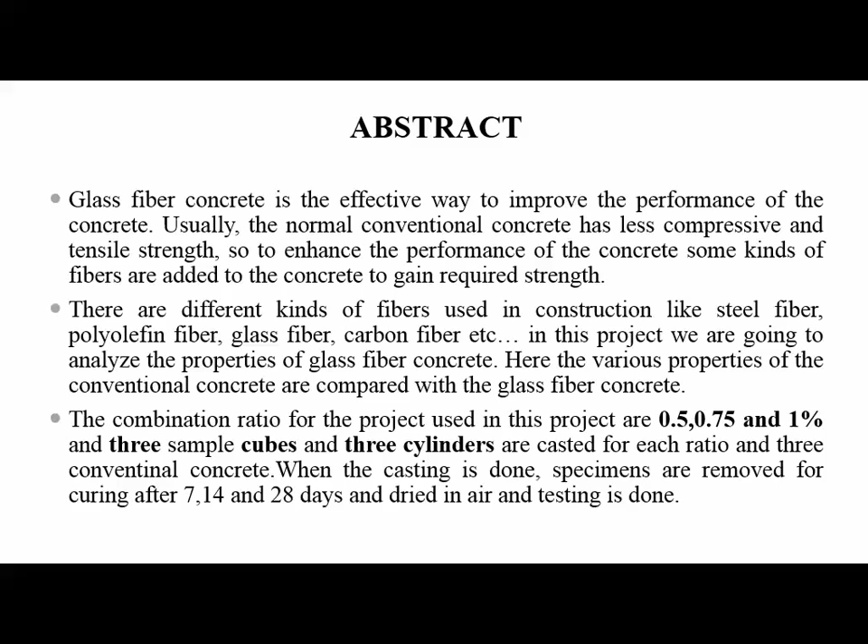Introduction. GFC is an effective way to increase the durability and toughness of the concrete. It also increases the mechanical properties of the concrete like compression and tensile strength, creep behavior, impact resistance and toughness.

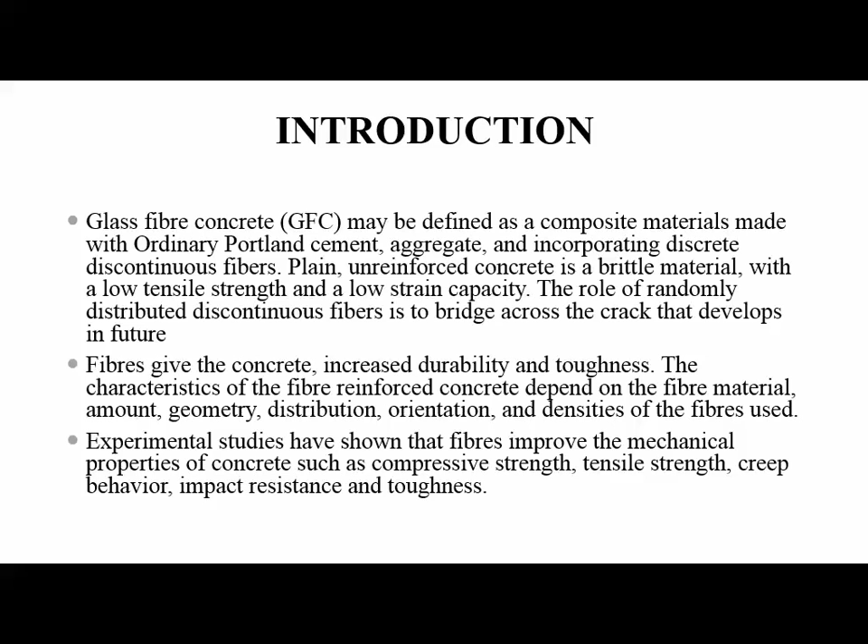Our aim is to determine the tensile strength and compressive strength of glass fiber reinforced concrete and to increase the performance of the GFC in comparison with conventional concrete.

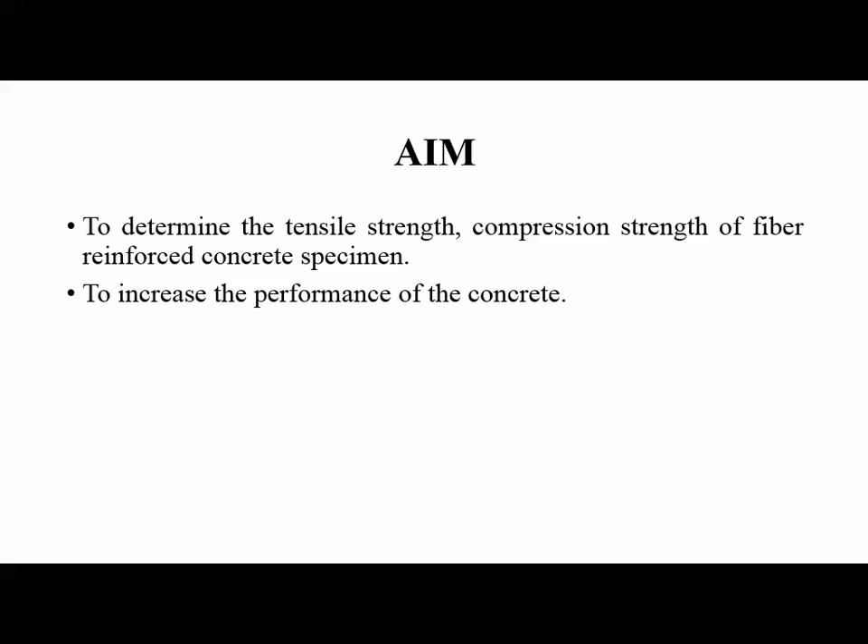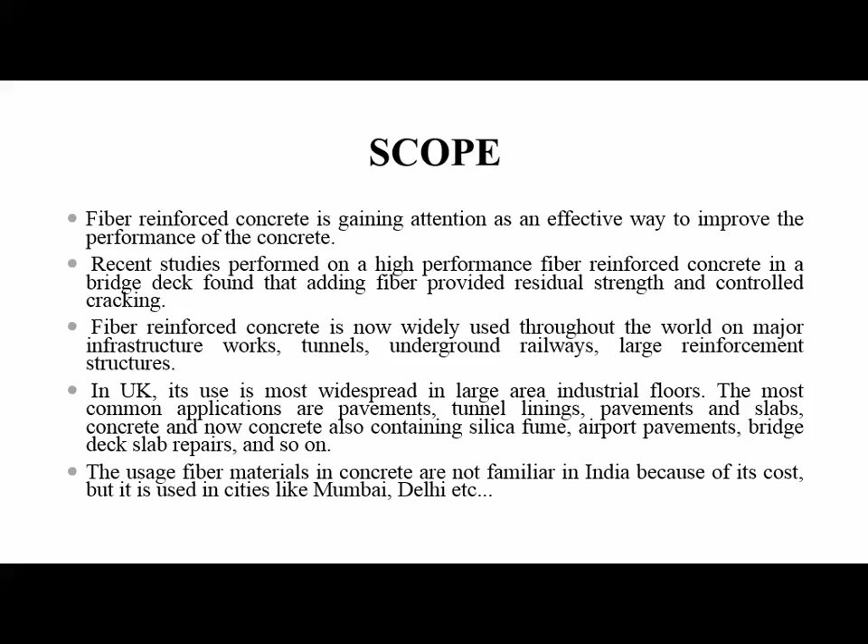The scope of GFC: it's gaining much attention. It's used commonly in developed countries like UK, but it's not used in India because of its high cost, but it is used in some major cities like Mumbai, Delhi, etc. The salient features of GFC are its high alkaline resistance, high dispersion, high immunity to corrosion, high flexibility, and high consistency.

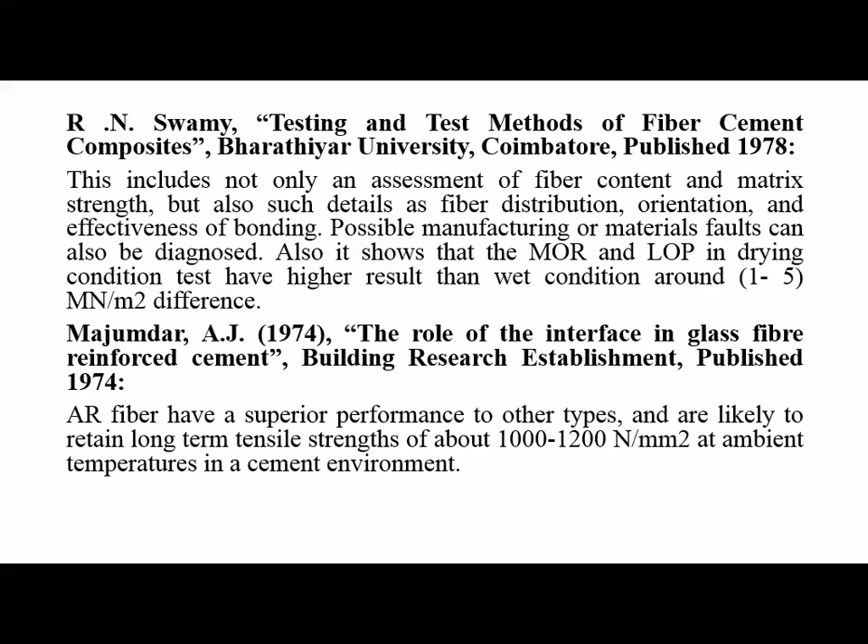Literature review. We study the following articles: Testing and test method of fiber cement composites by R.N. Swamy. The role of interface in glass fiber reinforced cement by Majumdar A.J. Cladding of buildings by Alan J. Brooks.

Methodology. The methodology we followed is first we collected the literature review, then the data collection and analysis of data, buying of raw materials, then preliminary test on the raw materials, then cube is casted and cured, then the testing of cubes and cylinders are done, then the results are obtained and compared with conventional concrete results, then discussion and conclusion, finally the report submission.

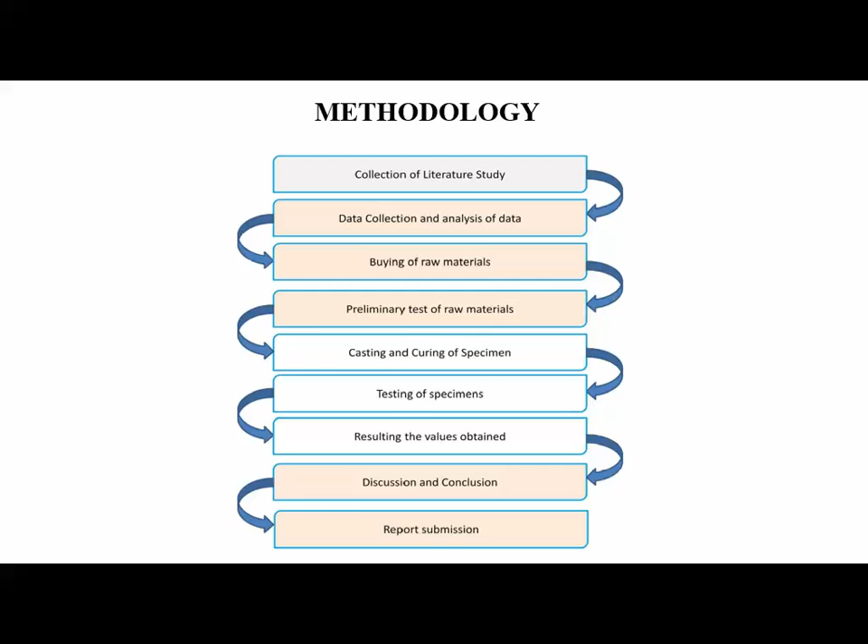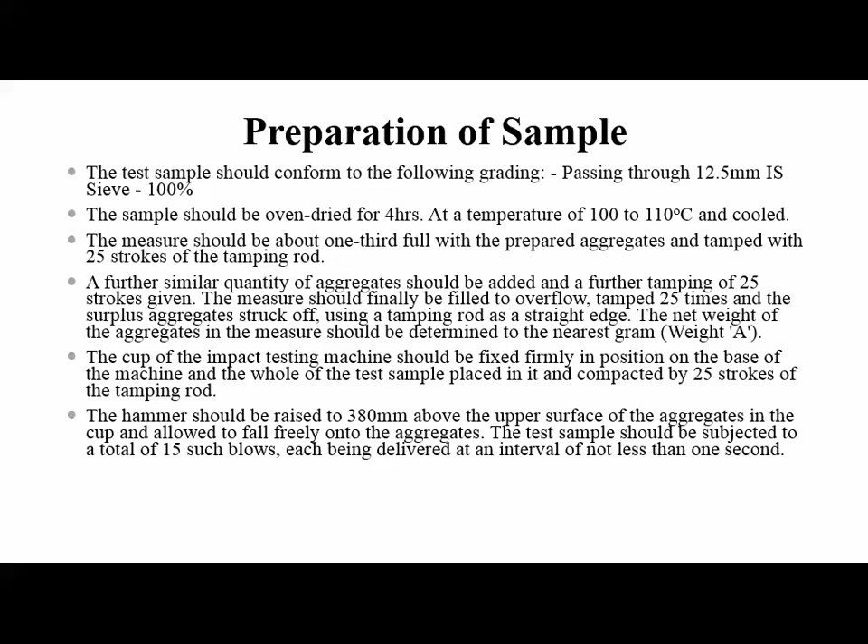Materials we used are cement, fine aggregate, coarse aggregate, water, and the glass fiber we used is Recron-3S. This is the preparation method we followed for the sample.

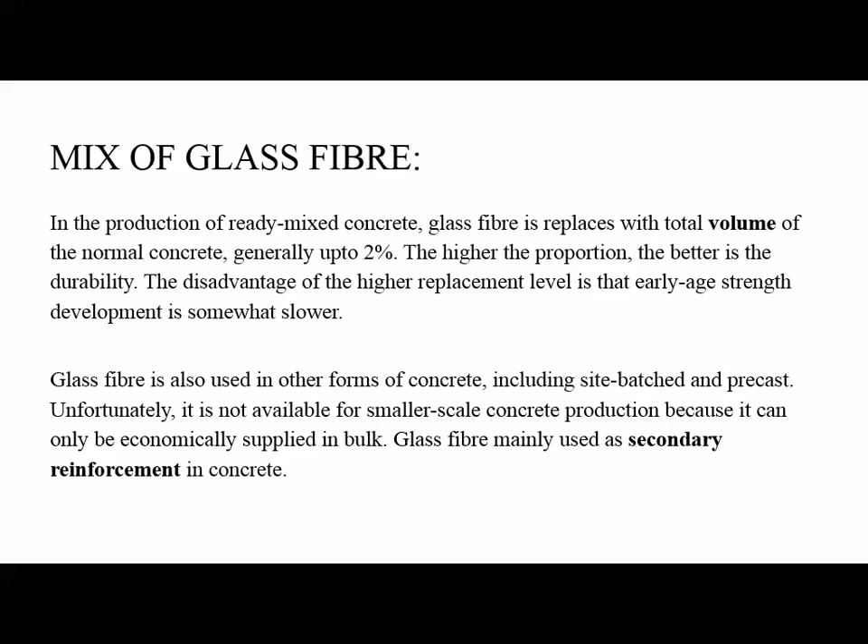Mix of glass fiber: Glass fibers are usually mixed with total volume, and it's usually up to 2%. They mainly act as a secondary reinforcement in concrete. This is our sample glass fiber Recron-3S.

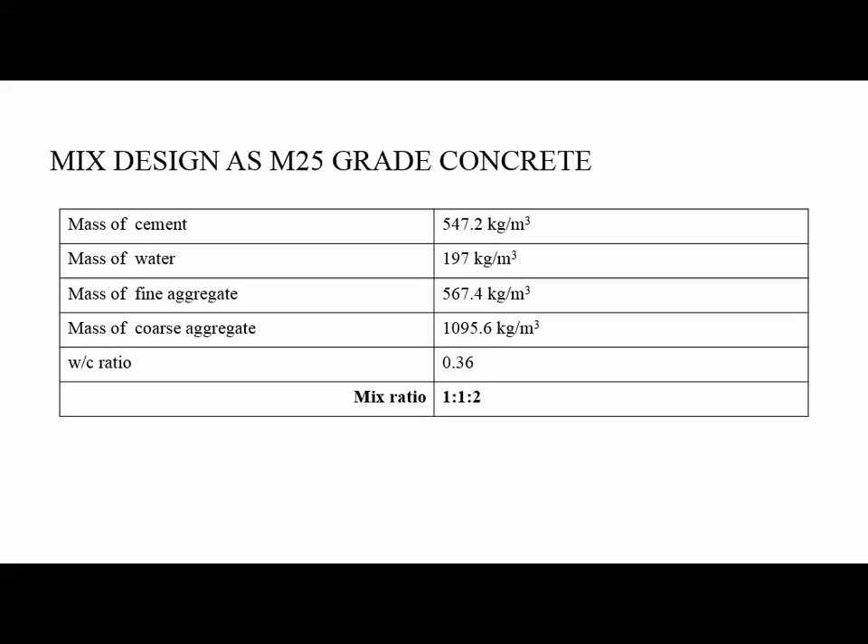Mix design we followed is M25 grade, and the mix ratio is 1:1:2. The water cement ratio is 0.36. This is the preparation method we follow for the concrete.

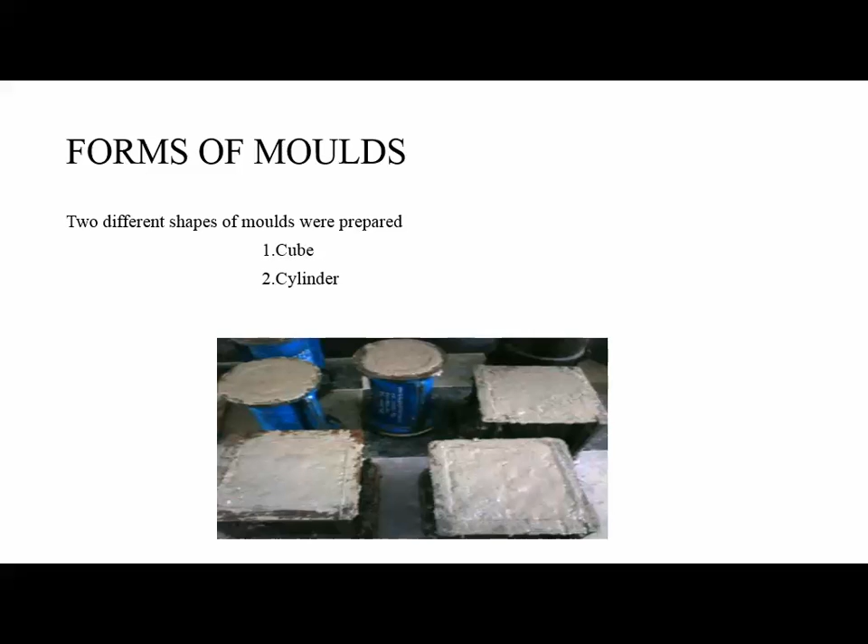The forms of mold we used are cubes and cylinders. The size of the cube is 150 mm x 150 mm x 150 mm, and that of the cylinder is 150 mm in diameter and 300 mm in height.

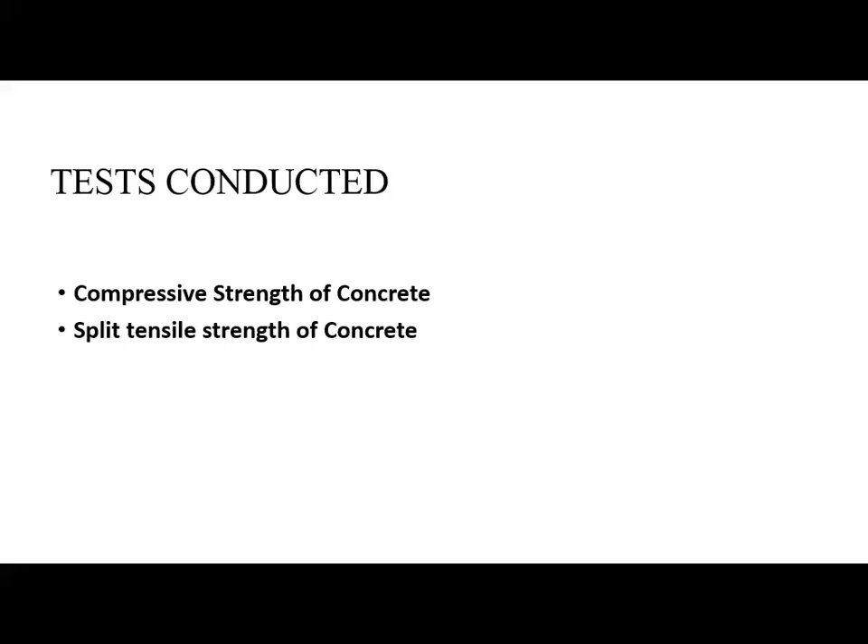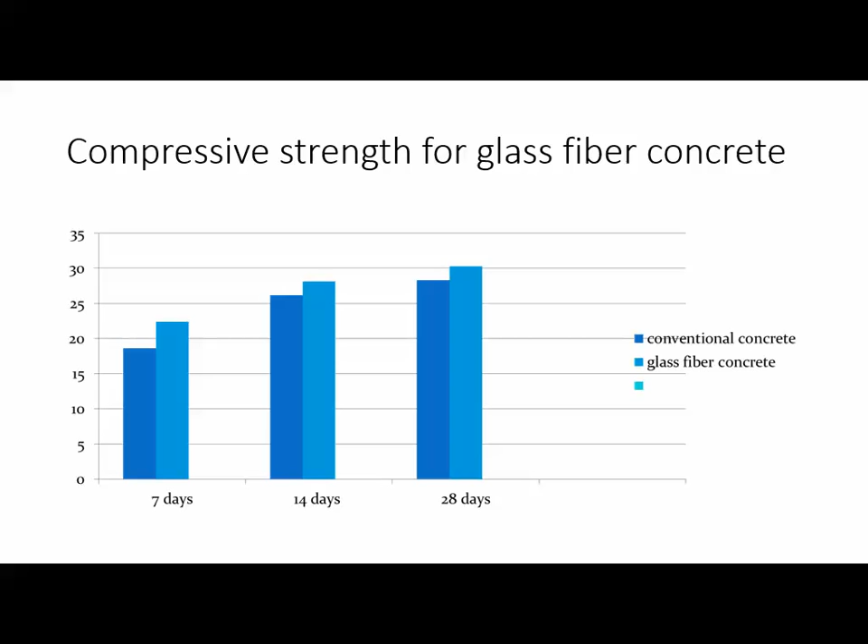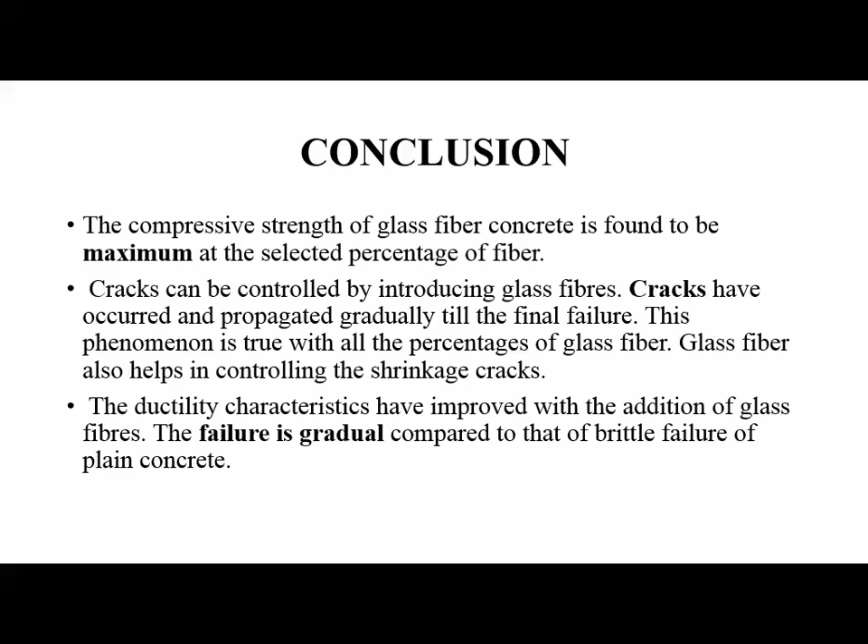The conclusion is we get the maximum compressive strength at the selected percentages we used. The cracks can be controlled with this, and the failure is gradual, while that of conventional concrete is a brittle failure of plain concrete.